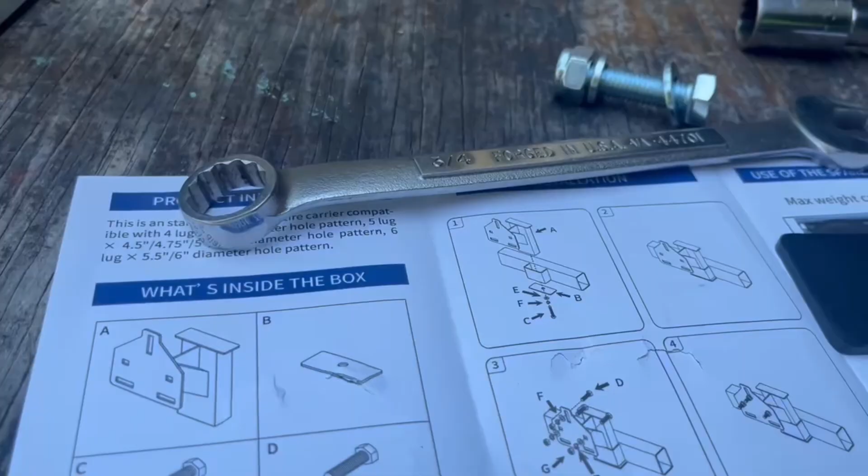Right here is where we're going to install it in this stake pocket. It'll come out just a little bit, in line with the trailer tires, I believe. Bolt it in, and then we'll mount a spare tire on it. This bolt, there's two bolts here that go in these screws right in here, and that's what this plate's for. It covers.

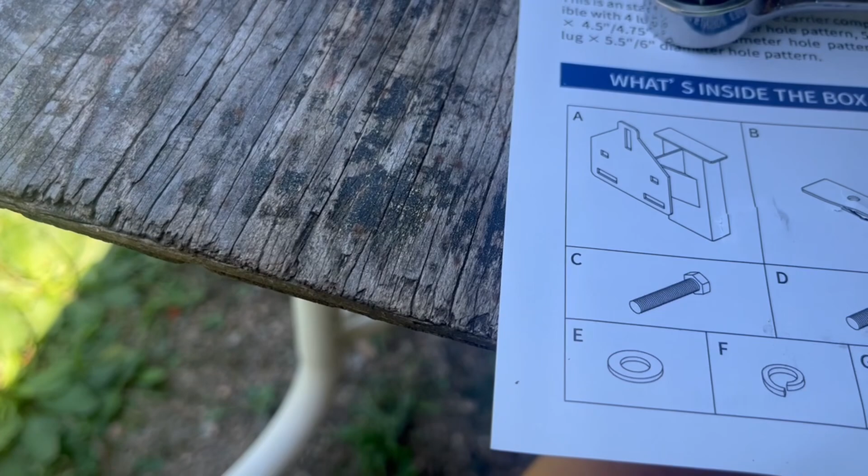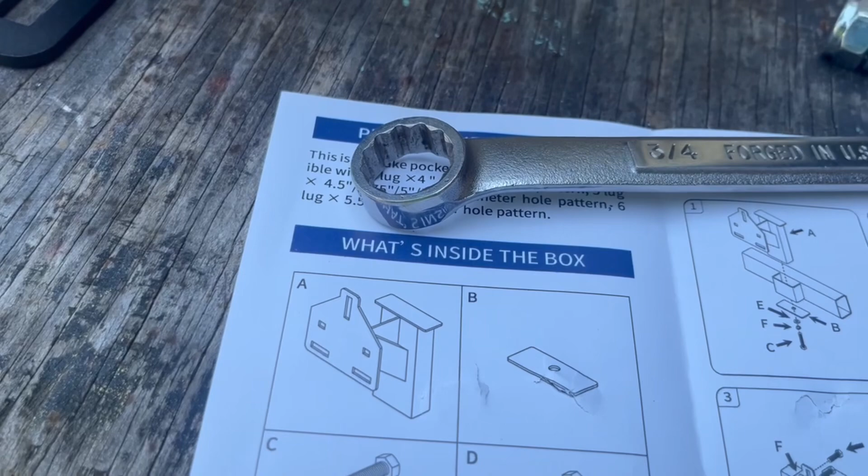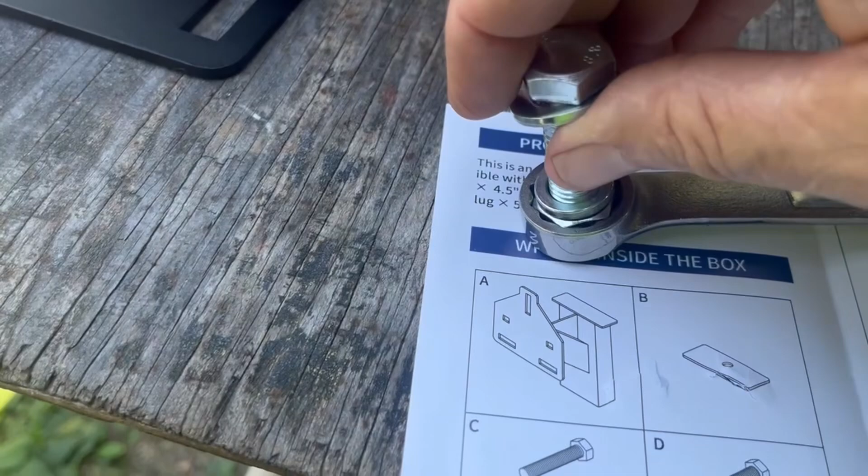I just wanted to check the size, 3/4. It's a little loose. I tried a 19 millimeter and it was the same, loose, so I'm just going with 3/4. And I got a ratchet also, this is for mounting the tire or the wheel. Same thing, it's a little loose. The nut fits better with this bolt.

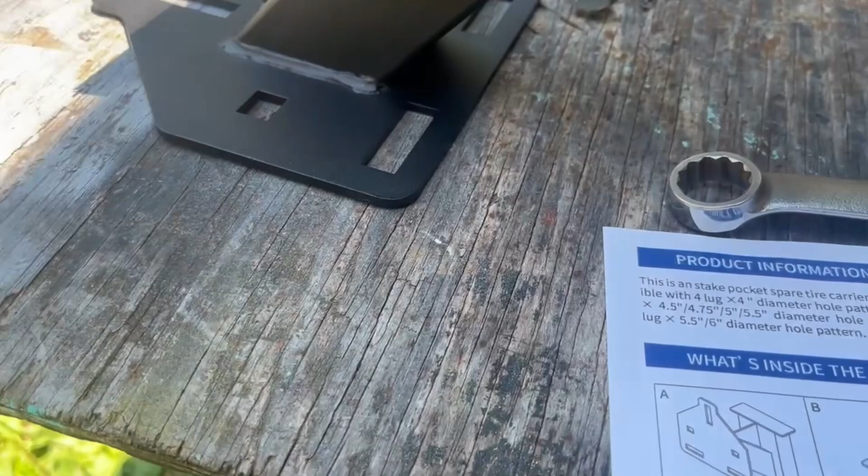Close enough though. All right, let me get you set up on the tripod, and here's a pretty laid out, simple instructions. You stick the mount down through the stake pocket, put this brace on the bottom with the two holes, run your bolts up through it, tighten it down, then mount your studs in these pieces here. They're adjustable, so you can get your wheel like you need it, and rock on.

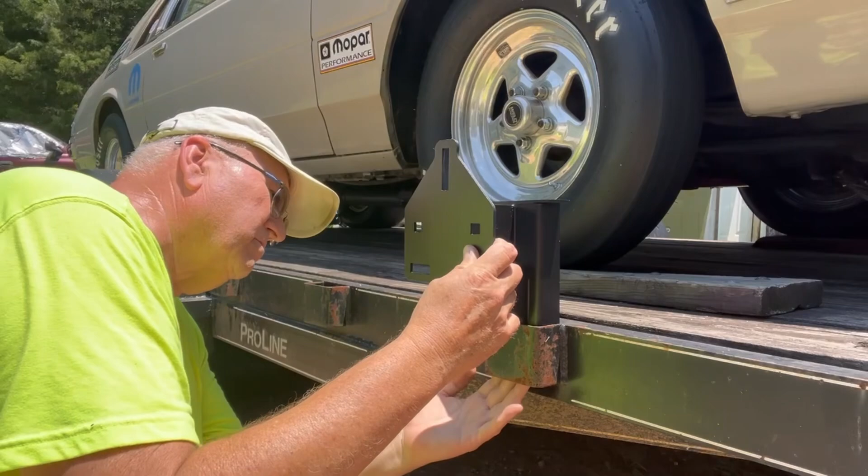Alrighty guys, let's keep going. So just drop that right there until it falls where it needs to fall. And in the directions, it only showed one of these and one hole. Obviously there's two, so that explains why.

That one started. I'm gonna put a lock washer on one and a flat washer on the other. The way I roll here. Bob's Classic Cars and Parts, we improvise.

We got that one started. Oh, we don't. I swore I thought that was going in. Oh, in the world, there we go. Don't cross thread, Bob. I think he's getting ready to. Yep, I think he's getting ready to. A lot of times they got paint on the threads, and that's what makes them do this. It's definitely acting like it's cross threaded. But I don't think it is.

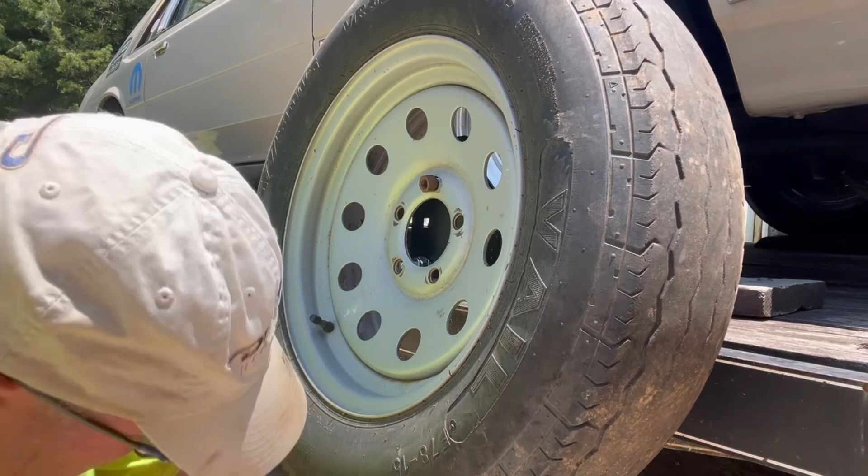Let me go grab a spare, I'll be right back. Alright, so I got the tire mounted. I got one lug nut kind of sort of started. That's just to hold it on there, really. That's all that's for.

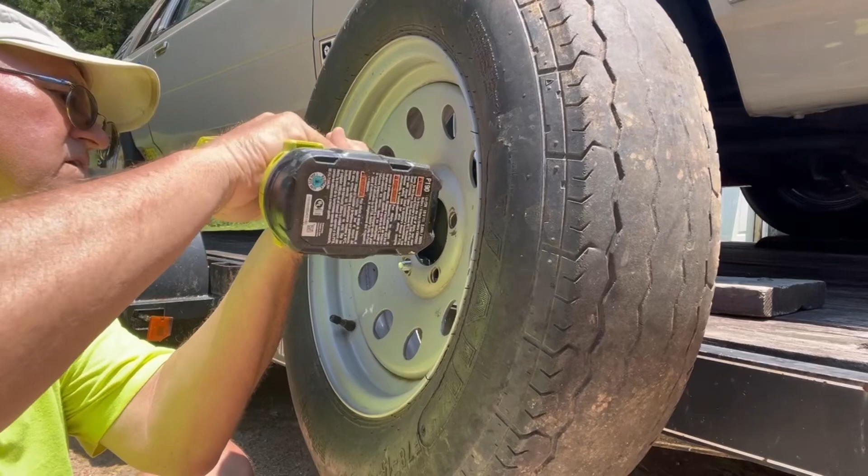Let's go back to the power tool. And there we go. Once you get the other one mounted, the first one mounted, you can, you got these loose, I didn't tighten them all the way up. I got to hold the back of it. Do is really tighten up the back side of that nut if we can. There we go. Grab my ratchet here.

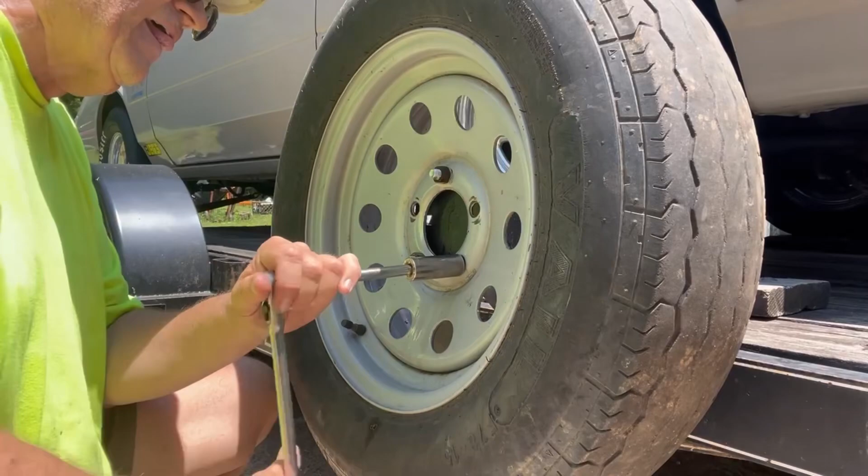All right, this one here wanted the lug nut stripped on me, so I went and got another lug nut, and I put some lubricant spray on it. And we're gonna do this one by hand, because I don't need to be on the side of the road with a flat tire and can't get this tire off, so I'll strip the lug nut. These cheap, you know where they made lug nuts and parts, studs. It still ain't going on. No, it's stripped out, that stud is stripped out. How about that?

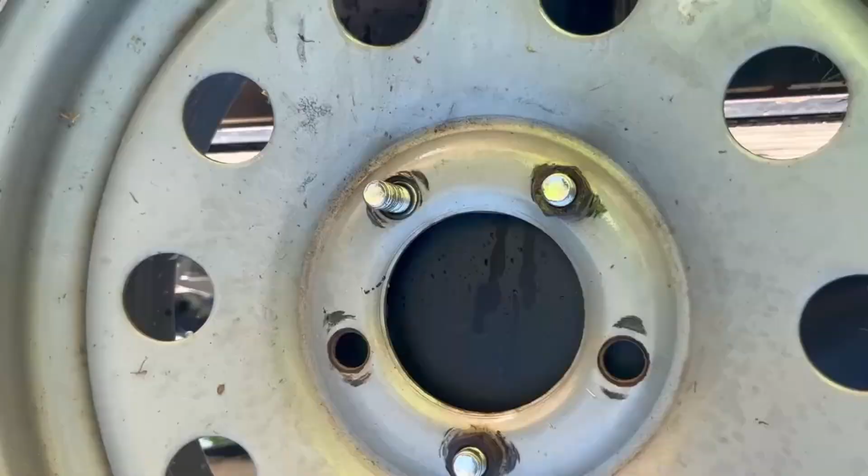Well folks, I was only able to get 2 lug nuts just tightened up. This one here is stud stripped. That's something I'll just have to fix later if they can bother to mess with it. I guess 2 is enough to hold it on, I think. But it's cheap stuff you buy nowadays from other countries. So anyhow, this is on there good and solid, good and tight.